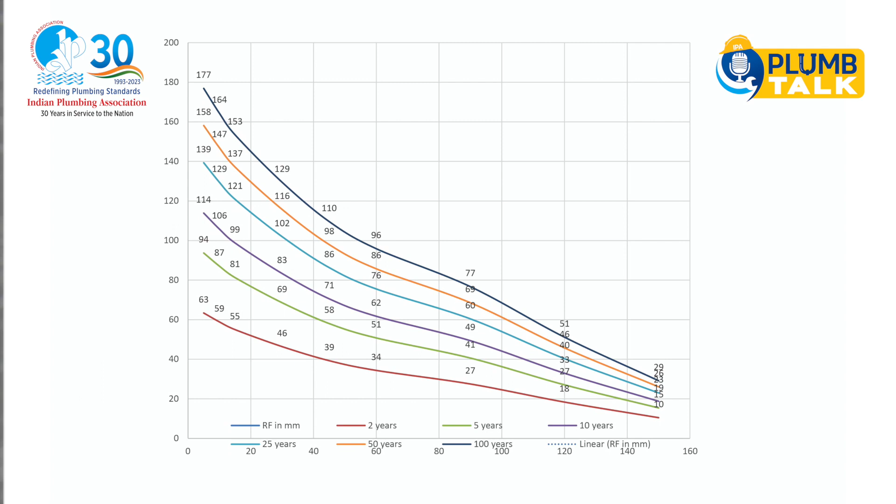Intensity duration curves are the curves used for working out specific rainfall intensity for your given time of concentration. The curve for a given frequency or return period is a plot of several storms of varying length, not a single storm plotted against time. These curves are very helpful in getting accurate design rainfall for your specific project time of concentration, and the design becomes more economical and correct.

Stormwater drainage system provides means of conveying rainwater from roads, buildings, open plots into the public storm network. The code regulates the design, construction, installation and quality of material used for drainage systems in order to protect the public health. Material for stormwater drainage piping used in India is predominantly RCC hume pipe, RCC or brickwork trenches. Very few projects use HDPE or DWC pipe or rigid PVC pipe for external water drainage.

Building code requires roof drainage water not to be permitted to flow over the public property or the side walkways. Roof drainage is also required for all buildings to prevent collapse of roof due to extra load of water on the structural slab. Where a plugged drain could allow rainwater build-up on a roof, a separate emergency overflow shall be provided. In single or dual family dwellings, it may discharge on a flat area to drain away from the building and adjoining property and shall not create much nuisance because the quantum is very small.

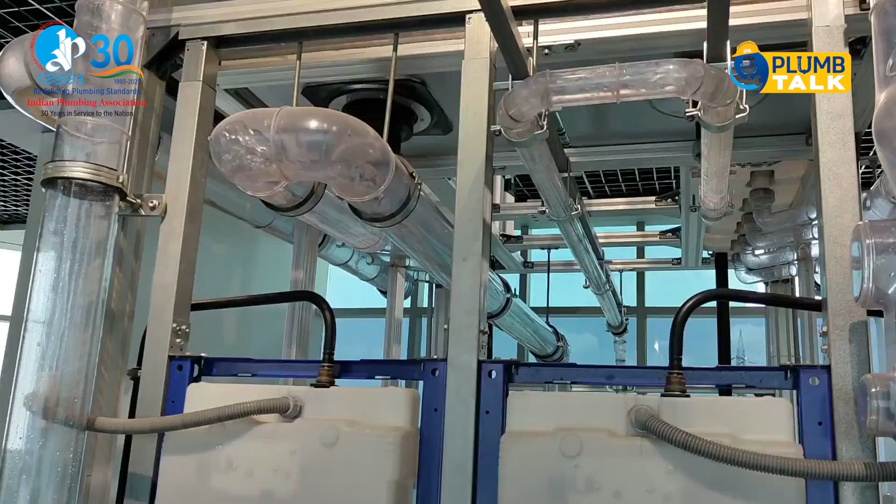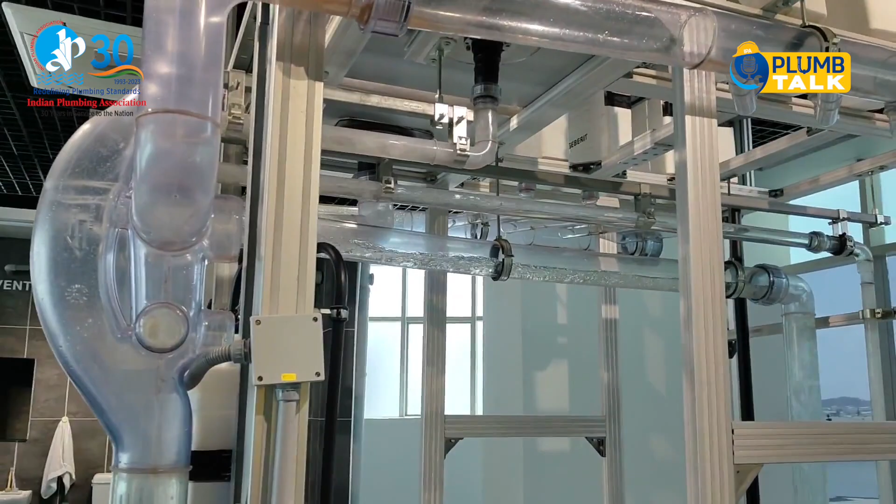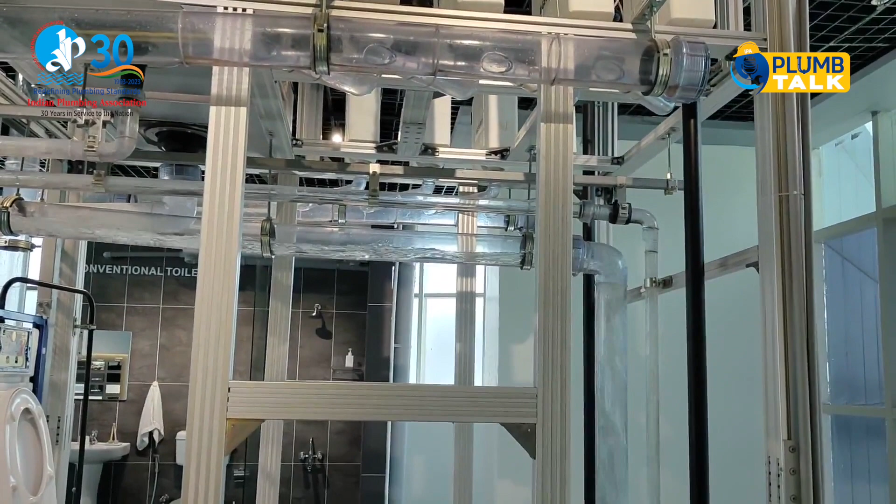You can see an arrangement showing gravity and siphonic systems in the same video. The siphonic pipe size is small. The gravity pipe size is almost double the siphonic. In the tank, both siphonic and gravity outlets are subjected to the same flow rate. You can clearly see that the siphonic pipe is running without any slope, whereas the gravity pipe is running with a slope. The water in the cross section of the gravity pipe is 50 to 60%, whereas in siphonic it is almost full of water.

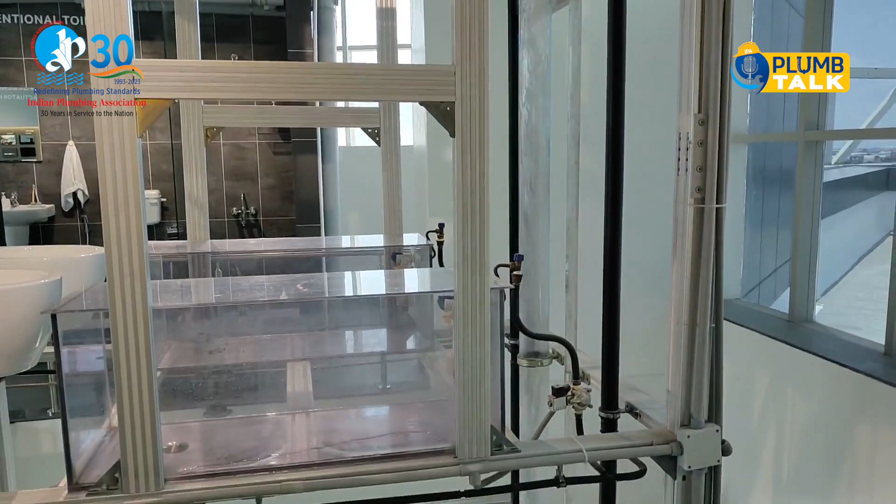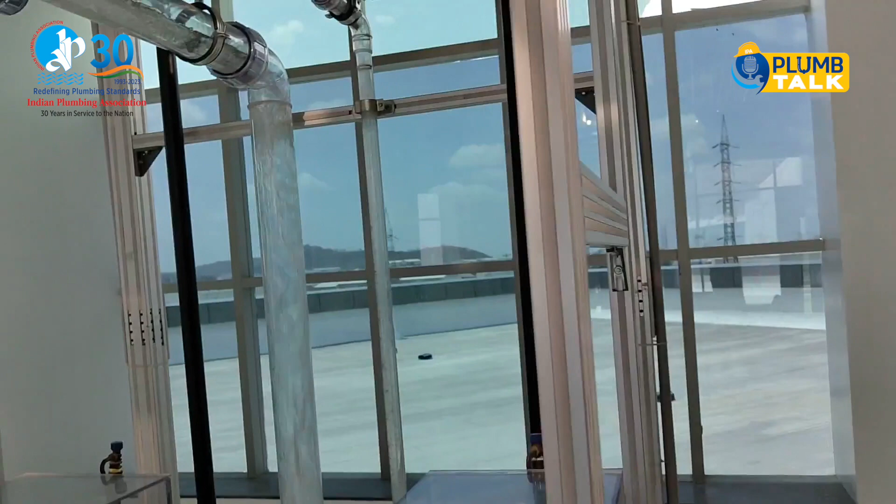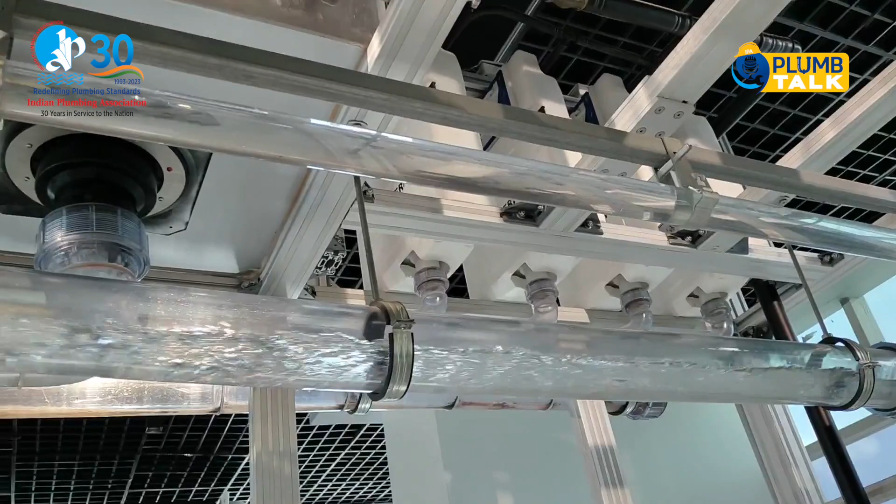When the pipe is connected to the last chamber, the siphonic pipe is also converted to 2 times the diameter to connect to the gravity connection at the end. This video clearly explains that in a siphonic system we can reduce the pipe diameter, we don't require a slope, and the same flow rate is taken care of. This is a very good demonstration which can explain much better than 1,000 words regarding siphonic.

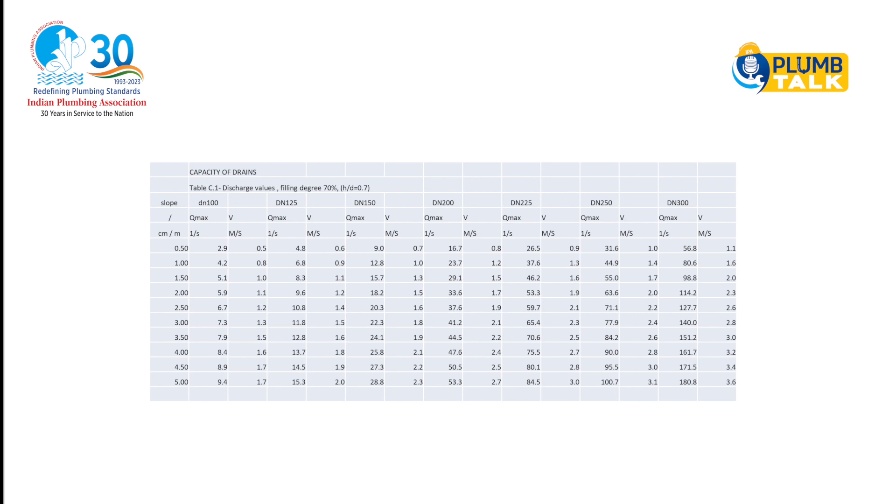For designing the ceiling suspended rainwater horizontal pipe, we use the chart shown in the video. This is from the BS code, wherein different pipe diameters with different slopes have been indicated, and the flow carrying capacity of all those has also been shown.

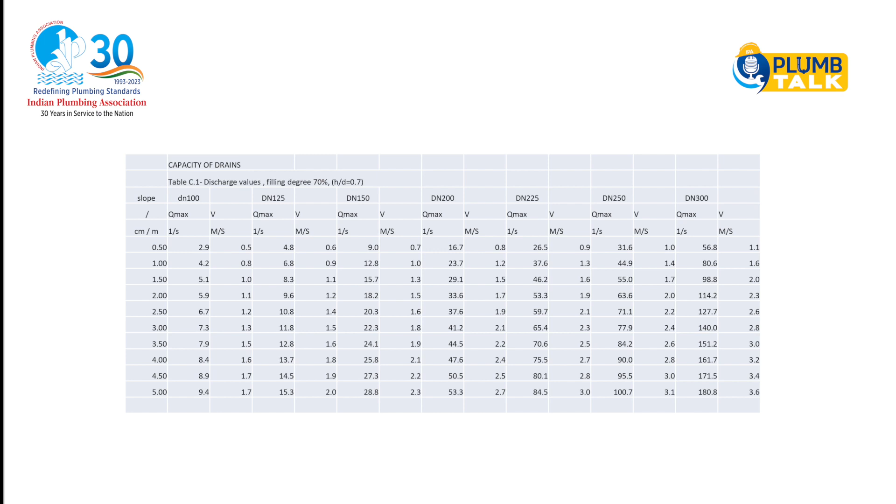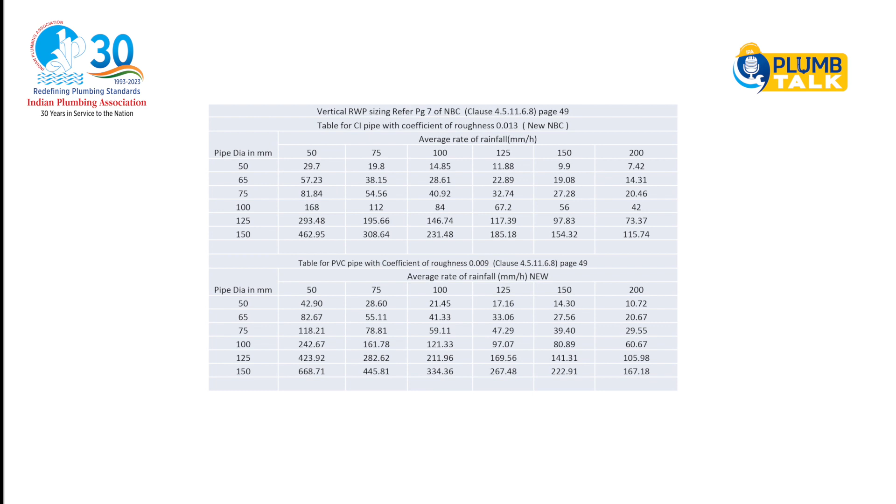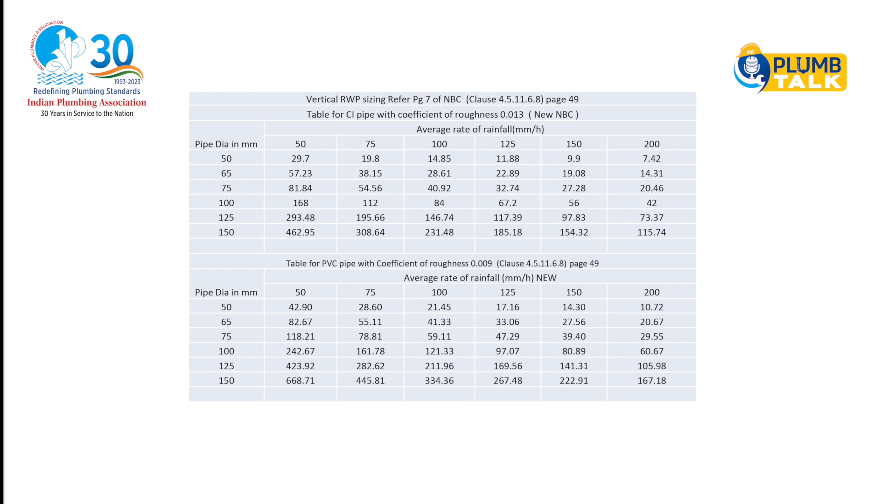This is the standard table from National Building Code 2016, which shows the load carrying capacity of different diameters for varying rainfall intensities. It is given in the form of square meters of catchment area. It is different for CI/DI pipe and PVC pipe. PVC pipe can carry almost 44% extra load as compared to CI/DI pipe because of the smoothness coefficient.

Now we will go to another drain system called the subsoil drainage system. Subsoil drains shall be provided along the perimeter of buildings having a basement or cellar. A perforated pipe of minimum 150 mm diameter wrapped with geotextile membrane is recommended. This pipe is backfilled with a free draining material like coarse murum, aggregate or coarse sand.

This pipe network is connected to the public stormwater system either by pumping or by gravity if the invert level of the public stormwater drainage permits. In case of a pumping system, the sump shall be sized as per the flow of subsoil water per day. Pumps shall be minimum one working, one standby, and they should operate on a level sensor. The recommended solid handling capacity is minimum 20 mm.

Here we completed the stormwater system. Now we will review the rainwater harvesting system, which is also an important aspect. In principle, rainwater harvesting consists of intercepting rainfall wherever it occurs, saving that water in various storage structures which can be either natural or man-made. We shall try to percolate the balance water to the maximum extent in the ground to raise the water table level. In short, prevention of losses through evaporation and beneficially using stored water locally.

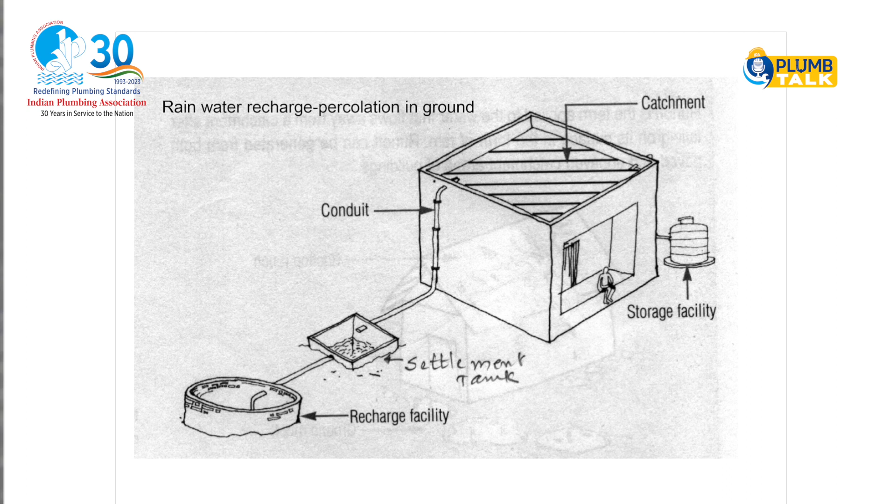Now we will see how we can harvest the rainwater, broadly in two ways. One is surface runoff harvesting, second is rooftop rainwater harvesting. Any water harvesting system will typically have the following elements: catchment area, conduit, first flush, settlement tank, recharge facility. Catchment area is any area or surface which will receive rainfall directly. It can be surfaces such as paved areas or terraces, courtyards of the building, lawns or open ground. In fact, temporary structures like sloping shades can also act as a catchment area.

Runoff factor determines the quantity of water which will be available from the catchment. Runoff factor for woody or grassland varies from 10 to 30%. That means the rest of the water is percolated, whereas the runoff factor for paved or terrace area can be between 70 to 90%, as most of the rainwater is available for recharge or storage except for water loss due to evaporation. Conduits are the pipes which carry rainwater from the catchment or rooftop to the harvesting structure. The conduit can be of PVC, HDPE, GI pipe or locally available material.

When you have terraces, the dust and dirt present on the terrace need to be flushed. First flush is a device used to flush water received in the first shower. The first shower needs to be flushed off to avoid contamination at atmospheric and catchment roof level. It will also help clean the silt and other material deposited on the roof, like bird droppings, during the dry season. Settlement tank is nothing but a storage tank which will collect all the rainwater from the downtake and allow dirt to settle in the tank. The overflow of the settlement tank will be connected for further storage.

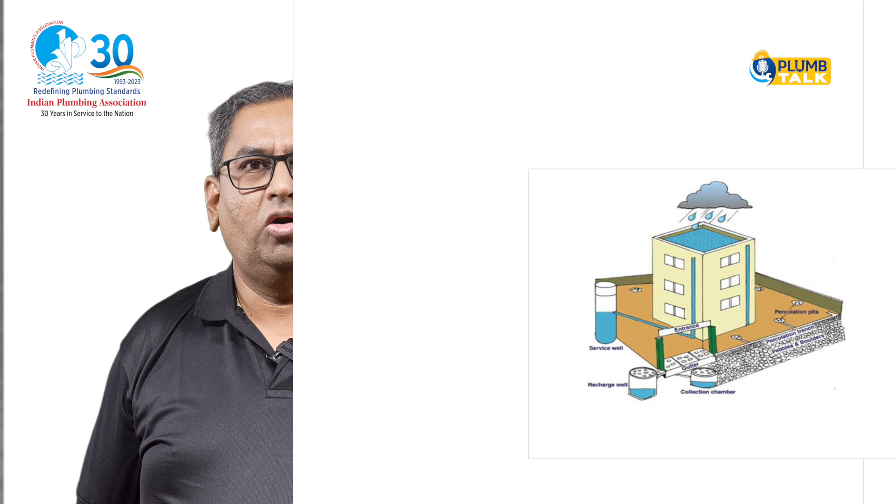In the case of village areas, we do not have much water from paved or terrace areas, but we have the majority of water from the surface area. So we do contour terracing of land and rainwater is held at intermediate intervals for percolation. Finally, it is diverted to a deep well or pond. Advantages of rainwater harvesting are that we will get water for direct human consumption, which is not possible by using any other machine.

We cannot generate water artificially on such a large scale. So, rainwater harvesting is the best way one can capture a large volume of water. In hot and arid places like Rajasthan in India, where there is a huge scarcity of water, whatever rain falls in the desert is absorbed in the soil or evaporates. In such places, rainwater harvesting in the form of storage is a boon. Rainwater harvesting provides self-sufficiency of water supply.

Now, let us discuss the disadvantages. If we have a large industrial roof of a fertilizer company and we try to do rainwater harvesting, then the chemicals on the roof will also get mixed along with the rainwater and it will have an ill effect on the groundwater which is stored.

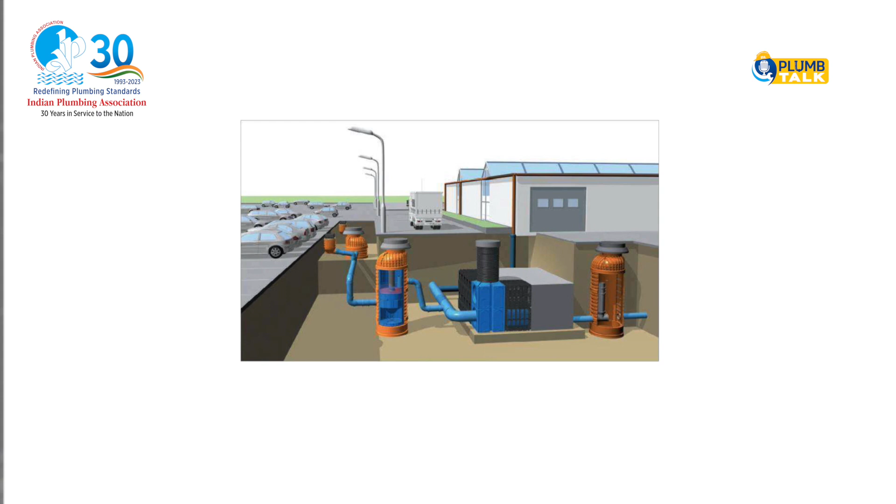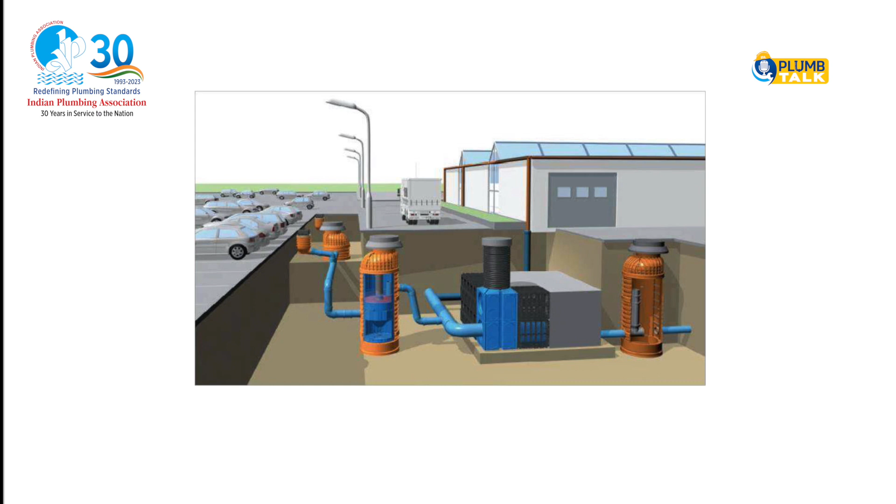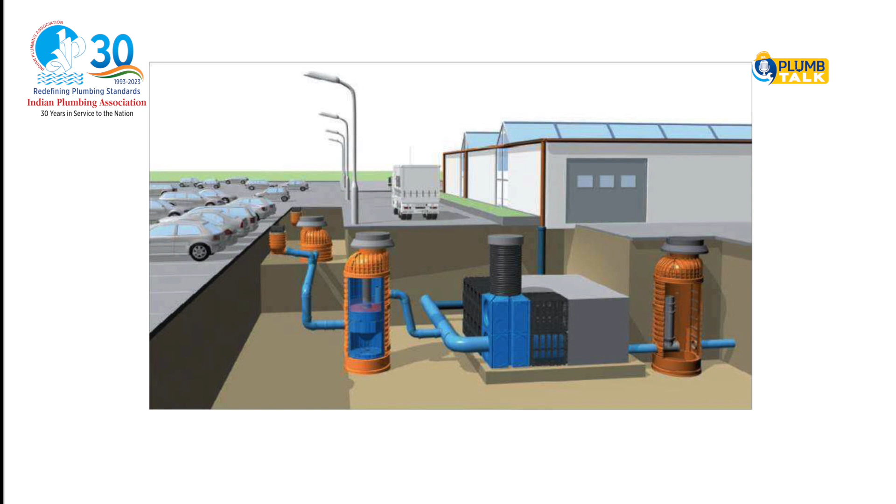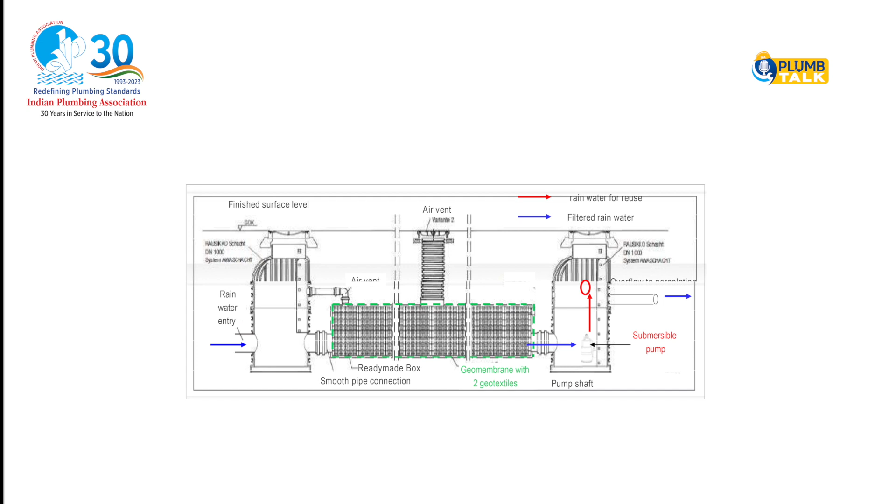This is a construction technology used for rainwater harvesting pits with ready-made boxes. You can see PVC or HDPE chambers are used to convey stormwater to HDPE containers connected in the form of jigsaw puzzle boxes. These HDPE boxes are prefabricated and they can be connected with each other very easily. In the drawing, you can observe that rainwater can percolate into these boxes after getting filtered through a geotextile membrane.

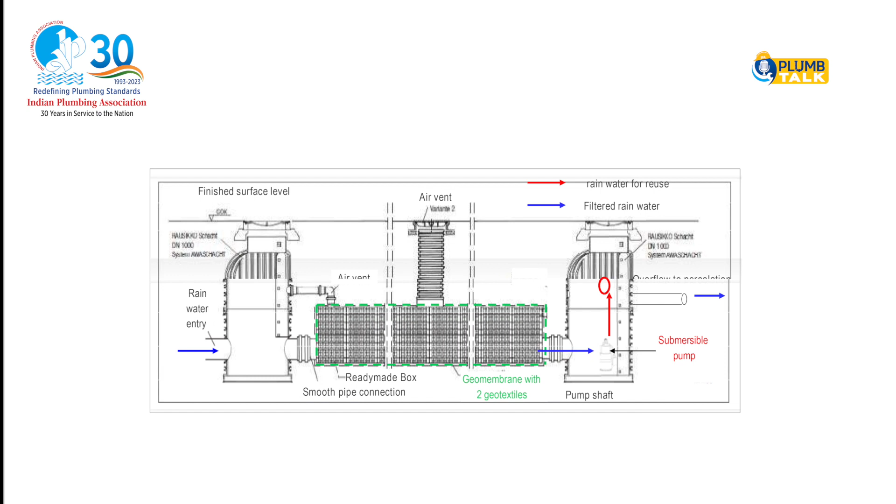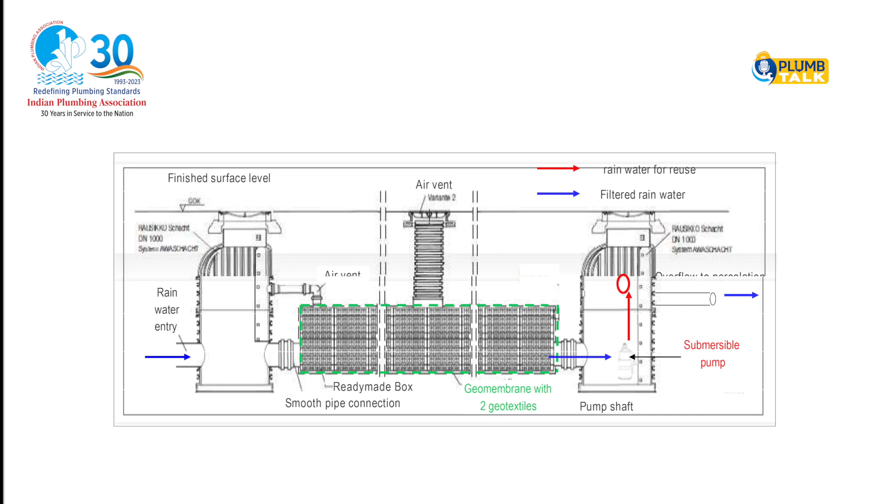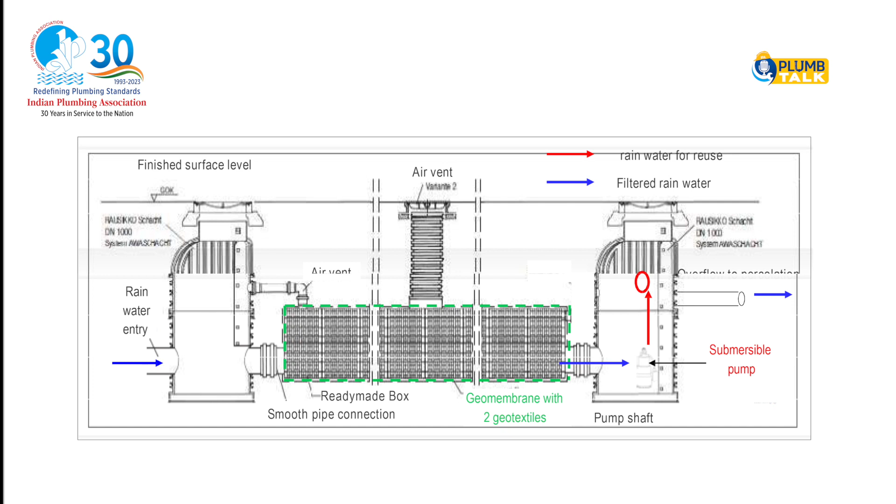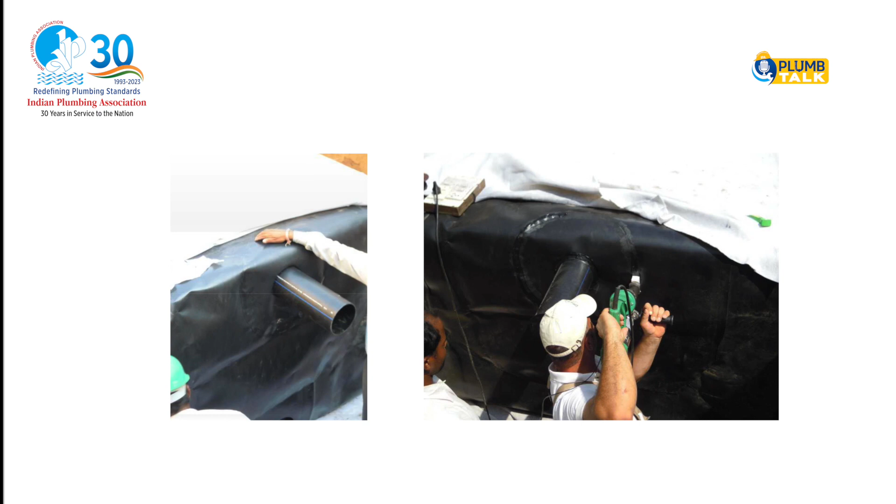These are a few of the construction slides which will help you understand. They have done the excavation and the leveling. After that, they have laid the geotextile and the HDPE lining. On top of that, these HDPE boxes have been assembled and they are completely sealed with an HDPE liner and geotextile again. The inlet and the outlet connections are also well taken care of.

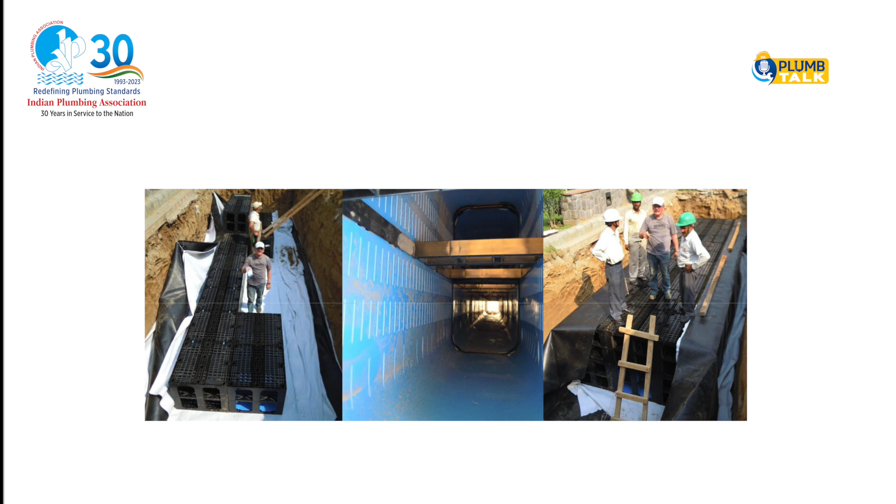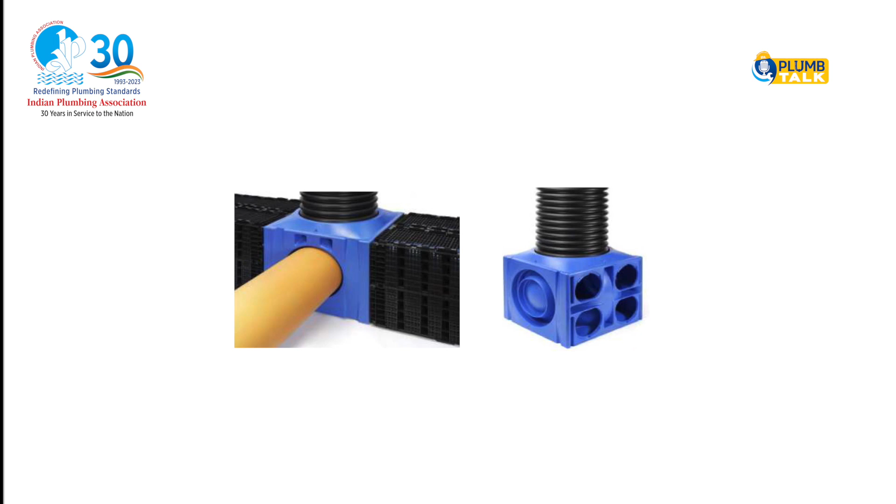This slide shows the storage of rainwater for secondary use. After the work is completed, the top is backfilled with soil and later on you can do the paving on top of that. The structure can easily take the load of car parking. These are a few indicative figures showing the connection of the cleaning shaft with the pipe and with the connecting HDPE boxes. These are a few more figures showing different sizes and shapes of the boxes.

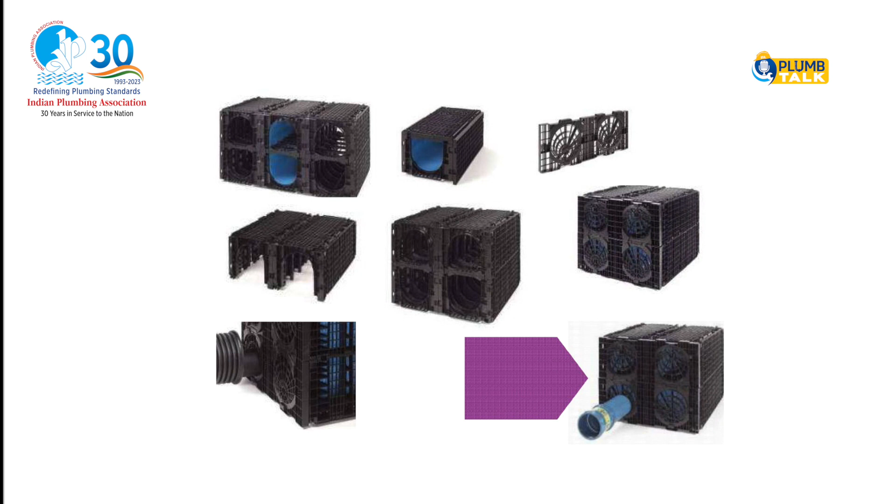Now let us see the modern technologies used for rainwater harvesting. Permeable concrete is one such technology. Resin bonded permeable concrete is a technology which makes concrete allow water percolation starting from 30 inches per hour to as high as 300 inches per hour per square meter. Pervious concrete is also known as no-fines or porous concrete. It is a very environmentally friendly solution for stormwater management.

The density is around 1900 to 2000 kg per m³, porosity varying from 15 to 20%, and a 7-day compressive strength of 12 MPa. This concrete provides smooth, attractive, UV stabilized, hard wearing surfaces. These are most suitable for applications like patios, pathways, courtyards, parking lots, etc. Super pervious, with a flow rate up to 10 times that of grass pavers and pervious concrete, is also available, and it is best suited as a counter solution to an alarming urban problem.

Aesthetically pleasing, highly durable, UV stable, hard wearing surfaces unaffected by salt, oil spills and ultraviolet rays. Pervious concrete will not fade in color or deteriorate with severe weather changes. Pervious concrete systems provide a slip and skid resistant surface. No loose stones, restricted weed and algae growth, a superb range of aggregate blends. We can use the system above a podium or non-pervious base.